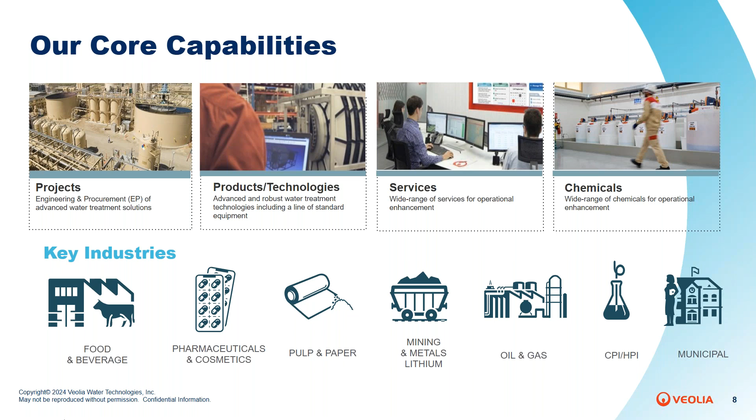Now I'm looking forward to introducing you to our two panelists you'll hear from shortly. First, you'll hear from Ryan Johnson. She's a large projects business development manager at Veolia Water Technologies and Solutions. Ryan has worked in the industrial water field for more than 22 years, with her focus mainly in the biological space of anaerobic and aerobic treatment, with a focus on water reuse technologies as well as biogas utilization.

Joining a little bit later in today's broadcast, you'll hear from Christina Gerber. She's a domain leader for anaerobic digestion. Christina has been with Veolia and within the biosolids and wastewater industry for over 20 years, with a BS in chemical engineering, an MS in engineering management, as well as being a professional engineer. She started out as a pilot and lab tech, with her career path progressing through project engineering, project management, proposals, and now technically supporting the various teams across Veolia.

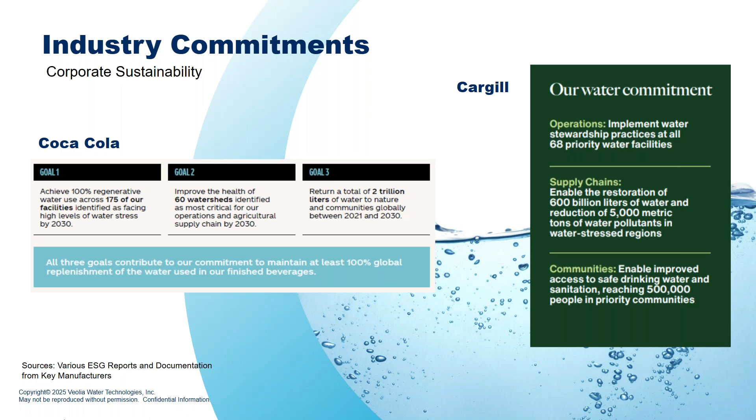Cargill, another partner, has a long-term water commitment as well. They want to implement water stewardship practices at all 68 priority water facilities across North America and around the world.

Staying with the beverage industry, Keurig Dr Pepper, many of you are probably having some of their drinks as we speak, is looking to partner with their highest water risk operating communities to replenish 100% of the water used in their beverages by 2030. So you can see lofty goals by some of these major organizations.

If we shift more to a food standpoint, Saputo and Campbell's both have lofty sustainability goals. Saputo is looking to target significant and sustainable progress by 2025.

One of the major drivers within the industry for our food and beverage partners is Walmart. They have a supplier sustainability assessment that's been driving sustainability in their supply chain, requiring many suppliers to define and meet their sustainability goals, most importantly to determine the prime shelf space within their stores.

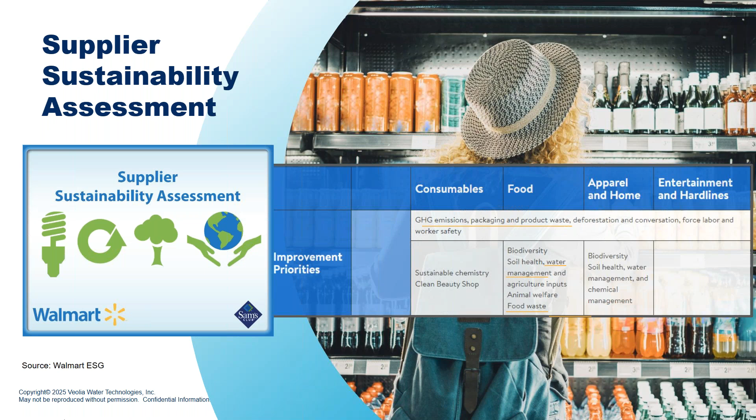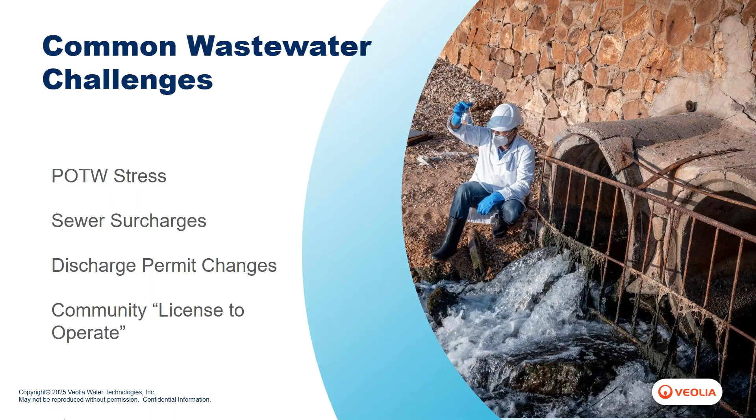So how do we manage all these different challenges and still make money? We have to juggle all of these components: corporate sustainability, water stress and scarcity, water regulations, and making money for our customers.

So over the next couple slides, Christina's going to talk through some of the different technologies that can be incorporated, and what some of the water management challenges and the strategies for sustainable water and wastewater management can be.

So if we move ahead one more, we can look at the common water management strategies that many of you are implementing already. Certain water mapping, audits, metering have been implemented. An easy one that you can tick off as low-hanging fruit is certainly employee training and behavioral analysis of your staff and your teams.

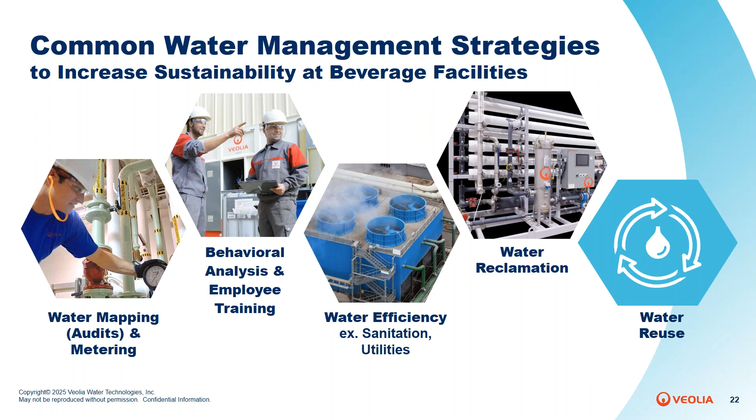Then we start to move into water efficiency. How can we look at water reduction across the plant? And then into water reclamation. Where can we potentially reuse some of this water? Non-contact streams such as boilers and cooling towers potentially are targets for water reuse that we'll talk a little bit more about as we go through the different slides.

Now, many of our customers and our partners are teaming up to have different add-ons to these facilities to get more out of their waste products. So again, Christina will talk through some of the different technologies.

If we look to incorporate an anaerobic wastewater treatment system, we're going to develop a green usable biogas that can be used in many different ways, whether it's pipeline quality or offsetting natural gas within your facility, or even electricity production. It's giving us a value for wastewater treatment.

We also have depackaging and recycling systems. We can send off those particular materials. It gives the opportunity to recycle any return products and give us the ability to, again, produce usable green biogas.

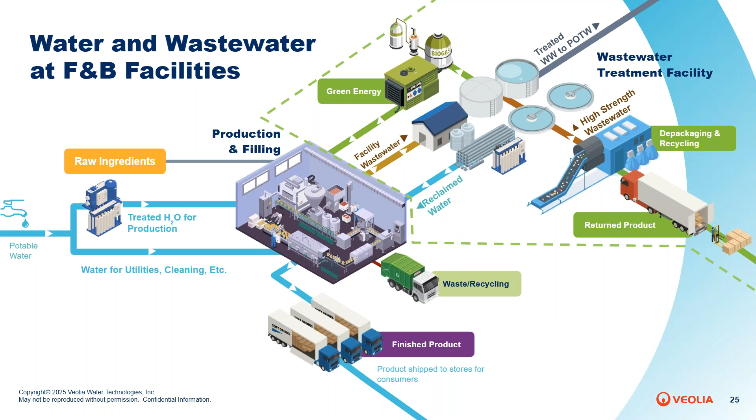So as we look at the impact of increased sustainability and the circular economy on wastewater, you'll see many of these things that are driving it is wastewater intensification. Many food and beverage producers are having much higher BOD and COD organic loading coming out of their facility, increased total suspended solids, and then a major driver we have seen in the last 2 to 3 years is increased total dissolved solids or salts in the facility, and that is going to require much more waste treatment, potentially to handle brine from a UF and an RO.

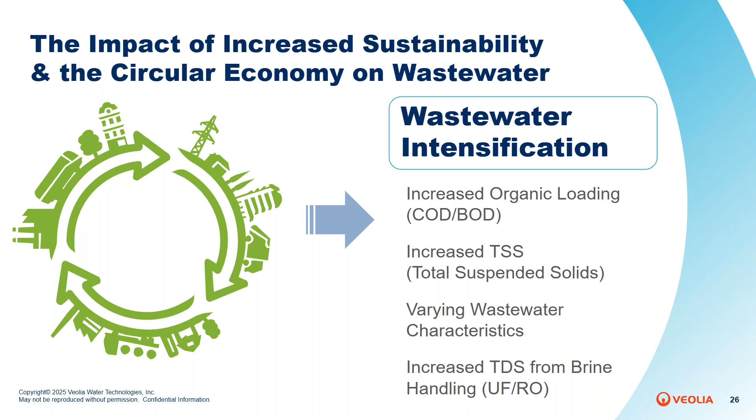So with that, I'd like to transition to Christina so she can talk through the technologies on how we can go ahead and overcome the wastewater intensification.

Christina: Thanks, Ryan. So like Ryan had mentioned, the increased TSS, increased COD and BOD are things that manufacturers are now having to worry about. Rather than just sending it down the drain, these types of constituents have to be treated.

So the key areas for wastewater treatment, Ryan touched a little bit on this, but we have depackaging. This can be when you have a food waste digester, recycling coming in, you can depackage it and send that through the wastewater treatment. Then you have a primary section, which is usually DAF, screening, any kind of big items coming out of the wastewater to try to get it into a uniform flow forward into the biological systems.

You also have some EQ, some pH neutralization, and any clarification. The main steps are the biological steps, and these are removing the BOD and COD. As Ryan mentioned, I'll be talking about the anaerobic section, but this also incorporates the aerobic treatment as well, which can also reduce COD, BOD, and reduce nitrogen, phosphorus.

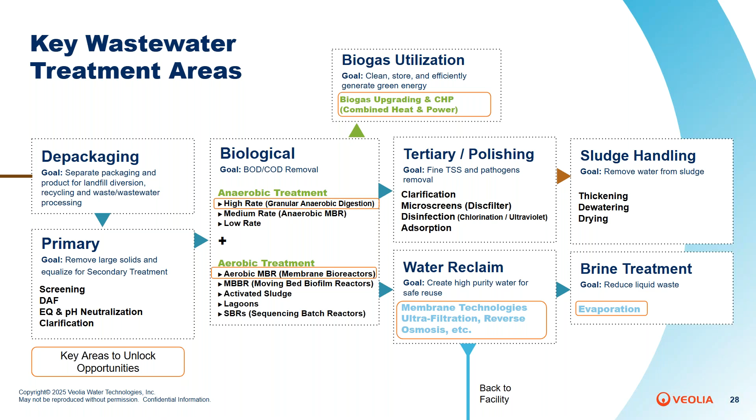So the first section is the high performance anaerobic technologies. And this is really just transforming waste into energy while reducing the BOD and COD.

Anaerobic treatment 101: there are three main steps in the biological treatment. First you have hydrolysis, which is essentially breaking up of the organic molecules. Then you have acidification, which takes those smaller molecules and turns them into fatty acids. The third step is methanogenesis, where it takes those fatty acids and creates energy in the form of methane.

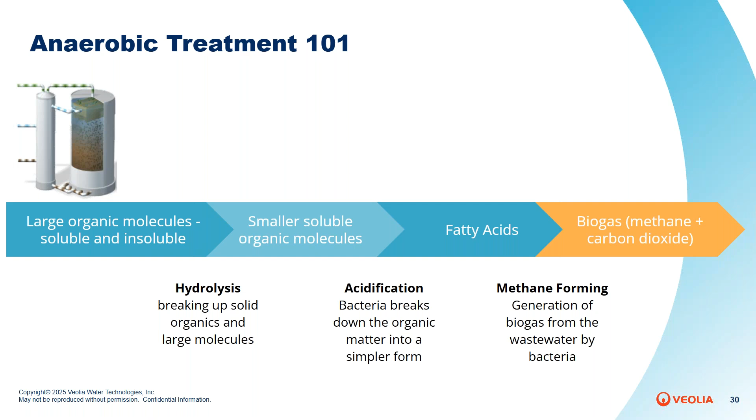This is the overall mass balance of a generic anaerobic system. If you have 1,000 pounds of COD going into an anaerobic reactor, typically you have about 80 to 90% COD removal. It fluctuates slightly between what the constituents are, but 80 to 90% is essentially what we estimate in the beginning.

From that though, biogas is made, and this is where the sustainability goals of a lot of customers come into play, where you can create this green energy from an anaerobic system. It is important to note that the anaerobic system is a roughing step. It will not get down to tertiary treatment - that's where you need to add some additional pieces and parts on the back end of an anaerobic system.

The biomass that is created from the anaerobic system is about 10 to 12 times less than an aerobic system. So you can already see the benefits, not only of creating energy, but also reducing your hauling costs for any type of waste from the system.

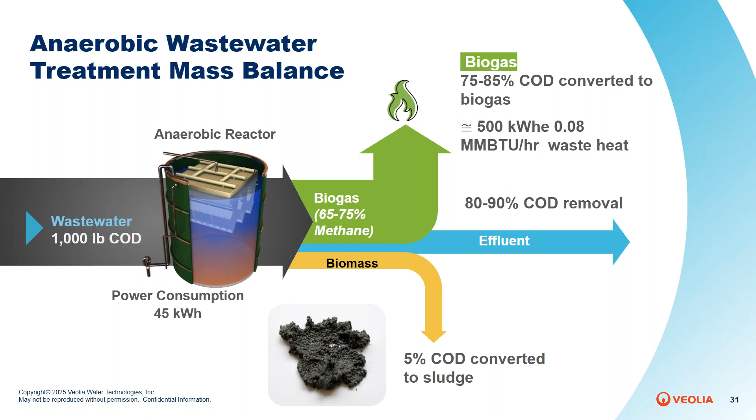So here is just a high level view of the different types that are out there. You have high rate systems - this is meant more for soluble COD, BOD systems. These are your sugar wastewaters. It also fits a lot of food and beverage, brewery waste into that category. I would say the biggest thing is the TSS, total suspended solids, cannot be too high.

That's where you would bump into a medium rate system if necessary - if the high rate system had too much TSS going into it.

The next up is the medium rate, which is the anaerobic MBR, the anaerobic SBR. These are loaded slightly less than the high rate systems and therefore do have a slightly bigger footprint. The anaerobic MBR is essentially taking a CSTR, which is a low rate system, and coupling it with membranes on the back end, and you recycle that solid stream back into the tank, which then decouples the HRT and SRT, allowing your food to microorganism ratio to be slightly higher.

And then the low rate system is a typical CSTR, which is a continuously stirred tank reactor. This is just a tank that is mixed continuously, and it has a hydraulic retention time of ballpark 20-ish days, whereas the high rate system's HRT is usually in terms of hours rather than days.

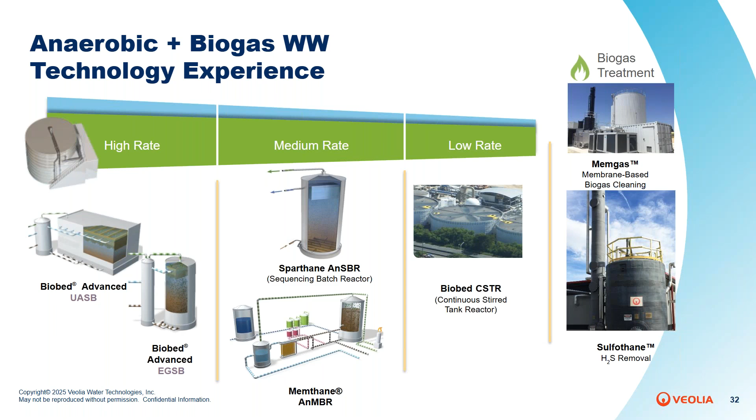So all anaerobic technologies create biogas. Biogas is approximately 60 to 65% methane, which is where the value of energy comes from. So that is actually what you're trying to capture and what you're trying to utilize as this renewable energy.

The remainder, 35 to 40%, is typically carbon dioxide, saturated with water vapor, and it has trace amounts of impurities. Those impurities can be H2S, hydrogen sulfide, which does depend on what the substrate coming into the anaerobic digester is. If it has high sulfate coming in, you will have slightly higher H2S in the biogas.

You can see that with different substrates, it could be industrial wastewater, municipal sludge, or a food waste energy plant where you have organic waste coming in. So the constituents of the biogas depend on the substrates coming in. But that raw biogas has 60 to 65% methane, and that is what you're trying to reclaim.

There are multiple different options for biogas usage. I would say 40, 50 years ago, people flared the biogas. Every anaerobic digester has to have a biogas safety flare on it, and that safety flare burns the biogas to not release it into the atmosphere.

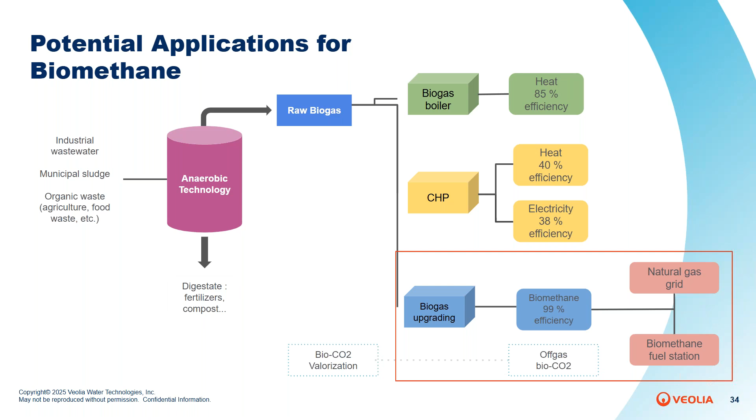The treatment process: the first step is usually drying, but depending on the H2S in the biogas, you might have to do a bulk desulfurization, which is kind of a roughing step to get out the H2S. If you do that, you get it down to less than 100 ppm of H2S.

Then it goes into a drying process step, which removes the H2O and the ammonia. Then there's an activated carbon filtration, which removes all of the impurities, polishing the H2S down to about 4 ppm, and removing any VOCs and siloxanes in the stream as well.

Then you get to a compression step. The biogas coming out of the digester is measured in terms of inches of water column, and the compression step takes it up to 200 to 250 psig. That compressor compresses it and sends it through some membranes.

These are a 3-stage process with Evonik membranes. Stage 1 takes it from 65% methane up to approximately 85% methane.

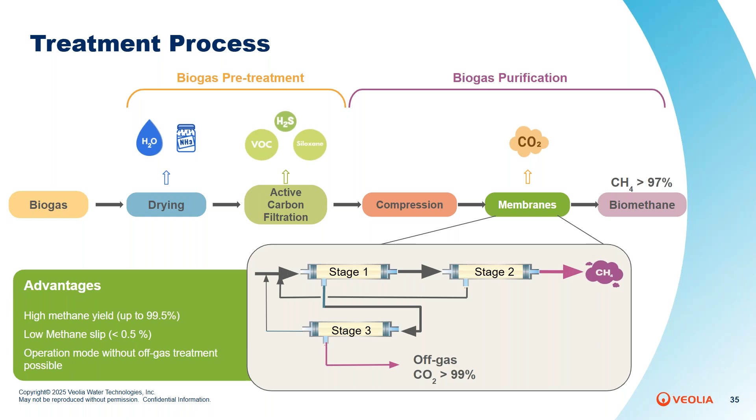So you'll have low methane slip through the system, and depending on your location - New Jersey, California, and Ontario require less than 0.5%, or potentially a thermal oxidizer on that off-gas stream. So depending on the location of your facility, this is something that can be utilized.

So then we talk about a case study that is an anaerobic wastewater treatment facility. This is a chocolate manufacturer in Pennsylvania, and their goal was to get their wastewater treated. They had an outdated wastewater facility, and they wanted to do better than the

sewer surcharges that they were going to be imposed upon. So their goal was to get less than 10 ppm of BOD, less than 10 ppm of TSS, less than 5 ammonia, less than 2 total phosphorus, and the influent was approximately 720,000 gallons a day with a COD of about 5,000 milligrams per liter.

But you can see that this actually is a perfect system for a high rate anaerobic digester.

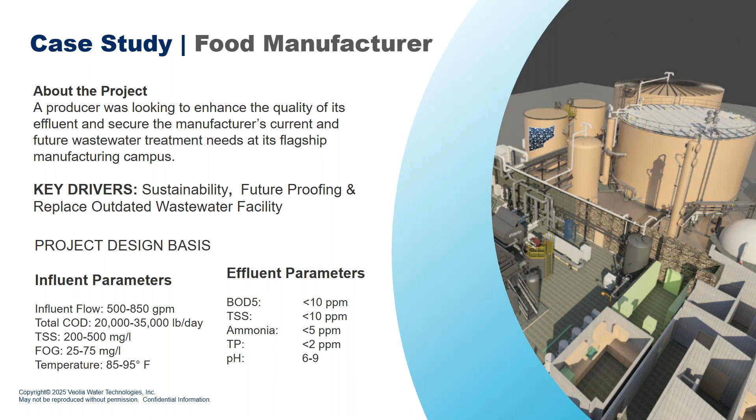So the treatment flow train was screening, then they had EQ to iron out the peaks and valleys of their production facility, the anaerobic digester, which is a UASB, an upflow anaerobic sludge blanket. The biogas goes to a gas holder through a sulfothane to clean it up, and then goes to a CHP.

The wastewater then is further treated by an aerobic MBBR. The DAF removes the TSS that builds up in the aerobic system, and then you have a disc filter and UV. So the results of this project actually are a very high quality effluent.

This is an energy positive plant, and the wastewater effluent is actually cleaner than what the city sewer requirements are. But this customer chose to invest in their future for a potential water reuse system.

And then also they sort of changed the way that they looked at it. Rather than a wastewater treatment facility, this actually can then turn into a wastewater reclamation facility. The nice thing about this is that it does produce 6.5 gigawatt hours of green electricity annually.

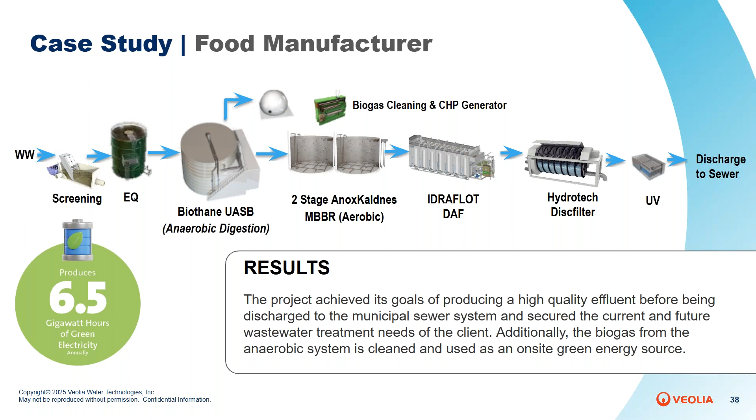So here is just a photo, and you can see the footprint of all of this. You have the sulfothane scrubber, which is the tower, that is a chemical wash system followed by a biological regeneration of that chemical.

You have the UASB, which is the tank in the center, and the gas holder right in the front, that's that bubble. That gas holder simply just irons out the peaks and valleys of the biogas production and going into the CHP, and that's the container, the black container is the CHP system. And then the enclosed flare is off of this picture.

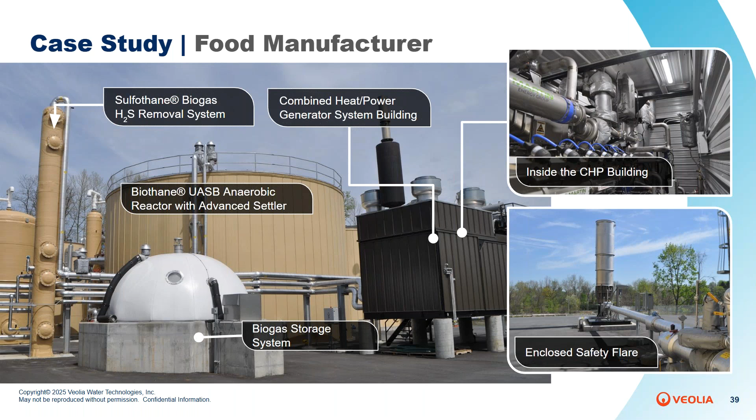So with that said, this was just one facility that had an MBBR. Next up, Ryan is going to talk about the aerobic MBR. Thanks, Christina, I appreciate that.

So as Christina talked through the last case study, you understood that there was an MBBR, but now there's also an alternate aerobic technology that we can look at for even a more pure effluent on the back end, and that's an aerobic MBR. It's a membrane bioreactor and the preceding step before an RO system for water reuse.

So as you can see, it's for biodegradable wastewaters, high COD, high BOD wastewaters, and it can also be used in anaerobic polishing to follow the steps that Christina talked about previously. And again, it's a pre-treatment step for the reverse osmosis system so that we can reuse and recycle water.

It's a small membrane tank that's going to have the membrane cassettes, and you can see in the picture on the right, those are actually craned into place, and there are multiple cassettes that can be added up and kind of developed on a modular basis as you expand the facility to treat anywhere from a couple hundred thousand gallons a day all the way to a couple million gallons a day of wastewater treatment.

It's all major equipment that you've seen on many of your other facilities: pumps, VFDs, membranes, air scour, aeration. It's not any unique technologies, but the way that it's structured together is what makes it unique.

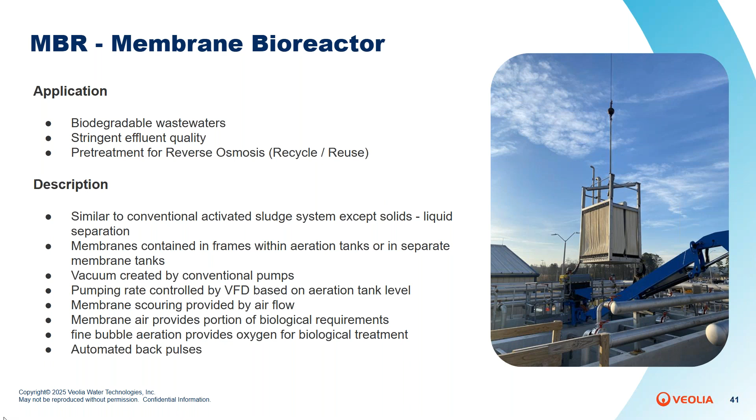This slide will show us the major pieces of the MBR. So number one, you're going to have a biological reactor, that's actually where all of the sludge is. It's where your blowers are going to send their air, and your biological sludge is actually going to degrade all of the BOD and the COD in the wastewater.

Then the material is going to be pumped through a set of membranes, and the membranes are going to pull a vacuum on the water. You're going to have the dirty sludge material on the outside of the membranes, and you're going to pull clean water through the membranes that can be reused.

Small control panel, and then permeate and air piping, and a permeate pump and air blowers. Again, not a lot of pieces of equipment to get a very pure effluent on the back end.

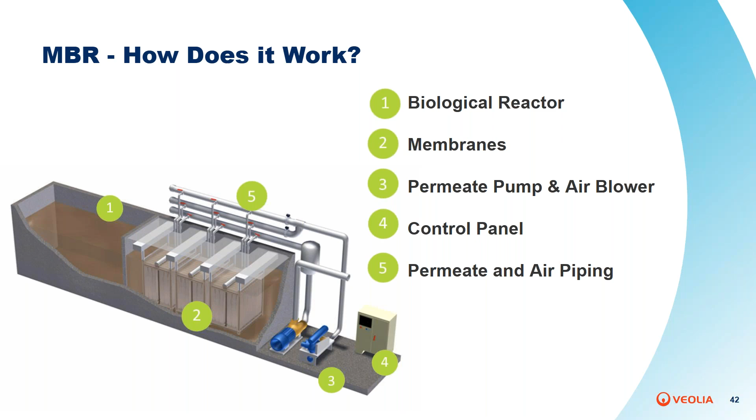So what are some of the advantages of an MBR? Most importantly, its footprint. If you look at a conventional activated sludge system versus an MBR system, which you can see in the box on the right, the conventional system is outlined by the red box, and the MBR footprint is outlined by the blue box. You can see that the MBR itself is nearly half, if not a little less than half, the size of the conventional activated sludge system.

When you're looking at already integrated wastewater treatment plants at food and beverage production facilities, there's not a lot of extra wasted space to incorporate wastewater treatment. So footprint is certainly an important factor.

More important than even footprint is the reliability and quality of the water you're going to be getting out. With the UF membrane, there's a physical barrier consistently producing high quality water. Your TSS coming out of this is less than 5 milligrams per liter. Your BOD in most cases is less than 10 milligrams per liter. That is well under all of the sewer surcharge limits, and it will be the perfect pretreatment for an RO system that we'll talk about in just a second. They have conventional equivalent life cycle cost to that of an aerobic, conventional activated sludge plant.

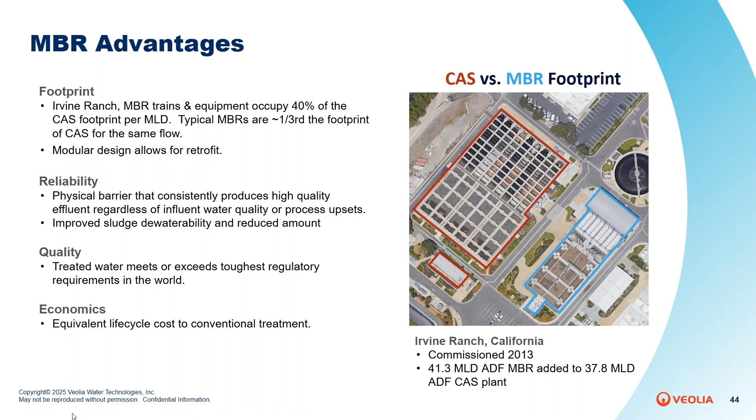Now, if we want to focus on water reclamation, we come to a reverse osmosis system that many of you have within your production facilities, whether you're getting water in from a town or a well, you send it through the RO system before using it in production. This is the same sort of system, just developed for wastewater. So you'll have your anaerobic system, potentially followed by your aerobic system, your MBR, and then it would be paired with the RO system.

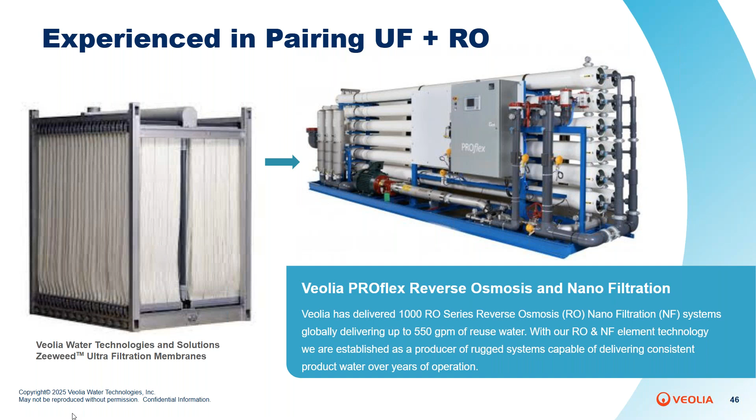We have a Veolia PROflex reverse osmosis and nanofiltration system. We have delivered more than 1,000 of these installations around the world to many of the top 10 food and beverage producers around the globe. This will give you the ability to recover up to 95% of the water that you send down in your particular wastewater stream.

The key to successful operation of the RO system is to be able to provide a good, consistent UF quality. So preceding the RO, again, we talked about the MBR. It's going to give us low turbidity, low bacteria, and low residual organics, low BOD, low TSS. That gives us the benefits to the RO: membrane protection from particles and biological fouling, and the ability for a higher RO design flux and a longer RO membrane life.

Going back to touch on something I should have mentioned previously, the life of the membranes in the UF system, the MBR, is approximately 10 years. So it's not something that's going to have to be changed out periodically. Once every 10 years will help keep the life cycle costs of the aerobic system down.

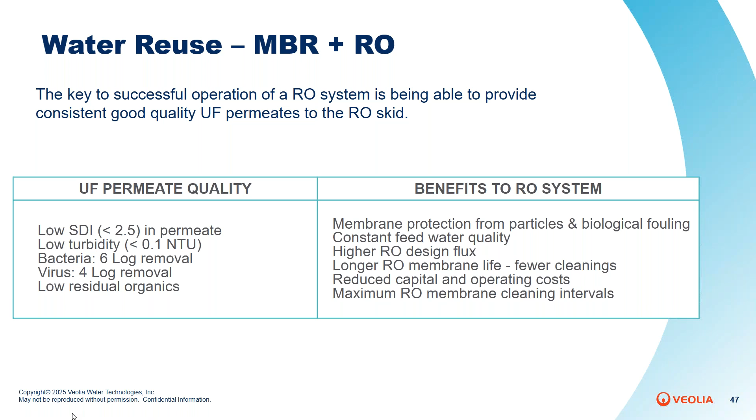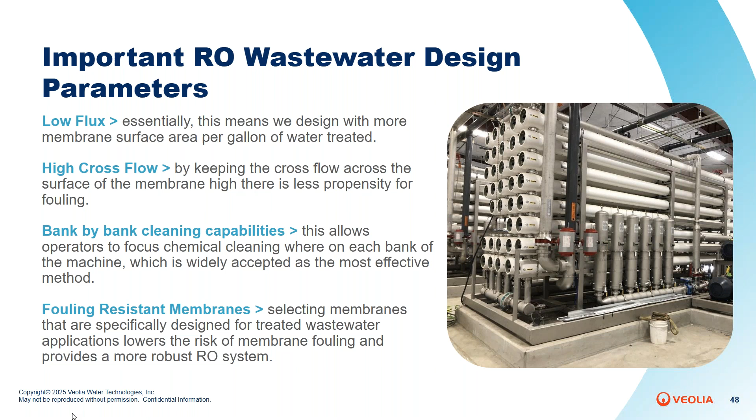So let's talk through a challenge of the RO. You're going to have impurities removed through the RO system, but it's also going to give you a waste RO brine. So you'll have the RO permeate, which can be reused back within the facility, but then you'll have a brine. How do we handle that brine? Can we get to zero liquid discharge? Because that particular stream coming out of the RO is going to be very high in TDS. So do we have to haul it? Can we discharge it to a municipality? Or do we send it downstream to a thermal system so that we can look at zero liquid discharge?

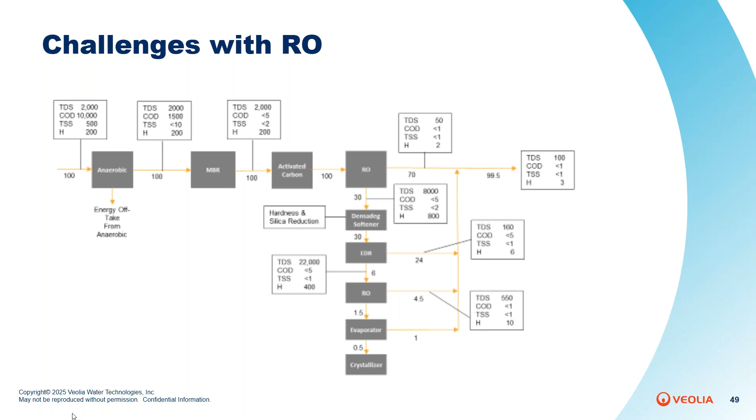Let's take a look at a quick case study. This particular facility has an MBR followed by an RO. It has both ingredient water and wastewater ROs with stringent quality requirements, sending nearly 50,000 gallons per day of combined brine to a tank specifically to handle it. That tank is hauled off multiple times per day at a cost of nearly $7 million per year. This customer is looking at a standalone evaporation system, a packaged evaporator, to offset the $7 million per year in hauling and recover additional water from the wastewater system.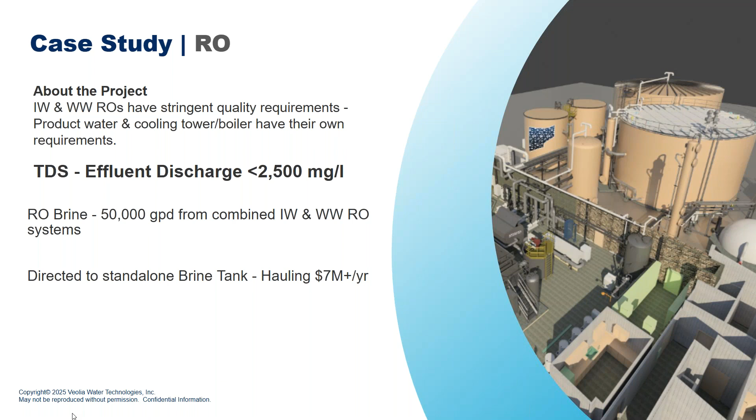So evaporation can be coupled with the RO as a solution for brine treatment and an overall reduced water footprint.

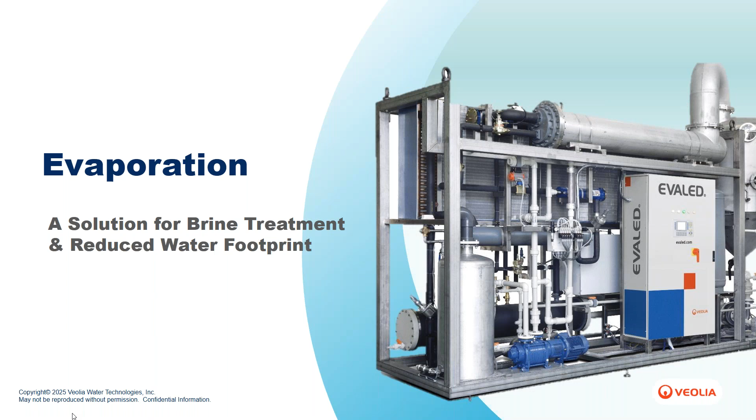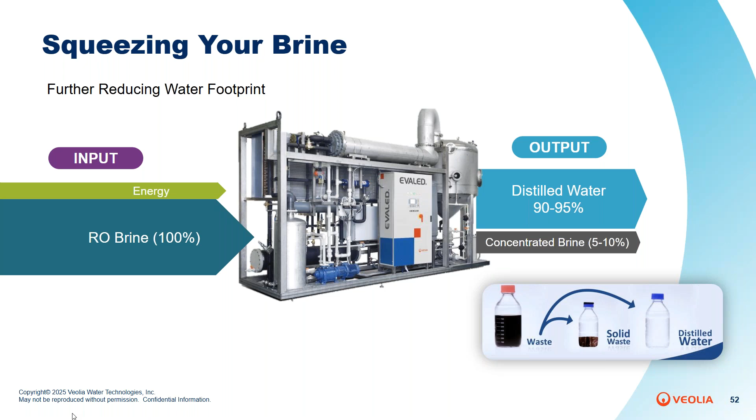We would incorporate 100% of the RO brine into the thermal system, whether it be evaporation or crystallization or some combination thereof, and come out with between 90 and 95% distilled water that can potentially be reused within the facility. You're going to have an ultra concentrated brine or even a salt substance that you have to handle from this system.

In the particular case study we looked at, the $7 million would be reduced to less than $500,000 for hauling the concentrated brine stream from the evaporator, and the customer would be able to recover an additional 95% of the water.

So how do we get started with a sustainable wastewater treatment project? We need to walk through the different steps so we can ensure successful project execution.

First and foremost, feasibility and due diligence. We need to do some sampling to understand the constituents of the wastewater: high COD, high BOD, high TSS, high fats, oils, and grease. Then we need to identify the technology and process design required, and complete engineering and design.

And then certainly execute the project from a construction standpoint. At the end, startup commissioning and performance testing so we can ensure the system was built as designed and we meet the effluent water targets throughout the system. We want to minimize the risk and optimize the outcomes for the owner.

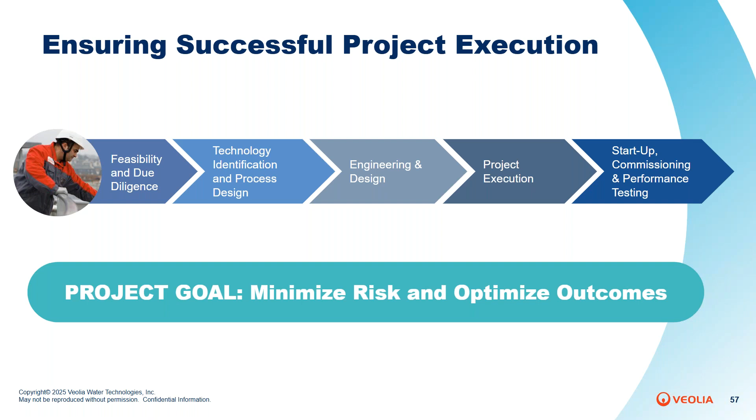So let's look at the sustainable wastewater project checklist. Are there certain corporate sustainability goals that we're targeting? Is there a water reuse target? Do you have high sewer surcharge fees you're looking to offset? Is there municipality or environmental regulations being driven by new sewer limits, BOD, COD, TDS? And do you have an existing wastewater system and are looking to add additional green retrofits, potentially biogas utilization or water recovery through that system?

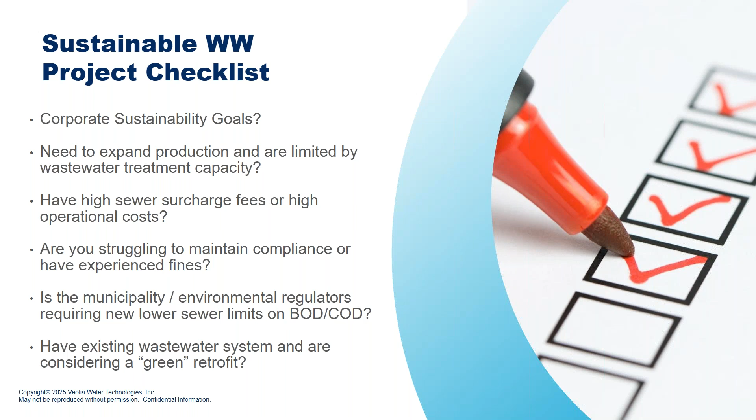So some key takeaways: wastewater intensification. These are various drivers that will impact the wastewater treatment facility. We have the ability for flexible wastewater treatment facility design, whether you're looking at anaerobic treatment technologies—there are multiple technologies—whether aerobic, all the way through to UF, RO, and thermal technologies for maximum water recovery and even potentially zero liquid discharge. You need to understand the trusted technologies you can utilize and the process that will be needed.

And then we want to unlock opportunities from wastewater. We don't want wastewater to simply be a cost. We want to be able to recover the green gas and water reuse back within a production facility.

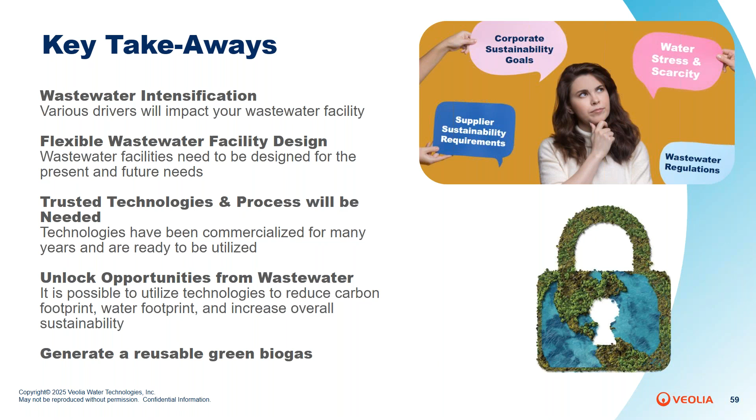You've covered so much in just such a short period of time with various processes and systems. It's all about maximizing and squeezing every bit, every molecule you can out of water to be reused, and also talking about how to unlock those things when it comes to the challenges it presents in wastewater through intensification.